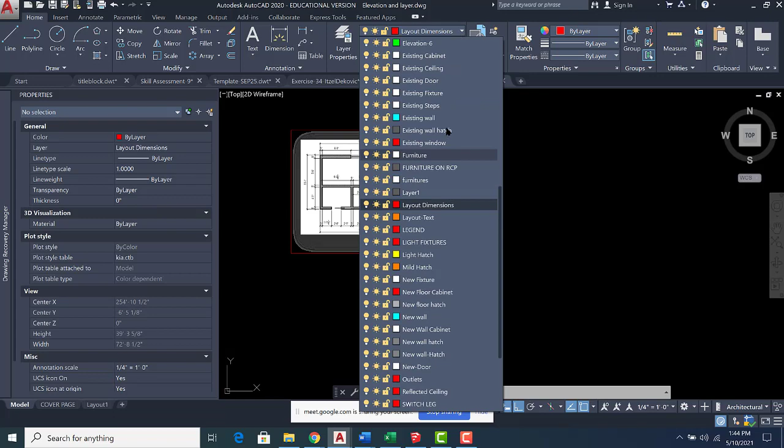So first of all, which layer is it? Existing wall. So I go grab the existing wall. Then I draw a line. Make sure your ortho is on, 17 feet 1 inch.

Then see, I have this line. Then I offset it 5 inch and 4 feet 1 inch, and again 5 feet. See, 5, 4 feet 1, 5.

So I start offset, 5. We stop the offset with spacebar, start it again, 4 feet 1, and I offset it again. Then stop the offset by a spacebar, start it again, 5 inch. See, so far I am here.

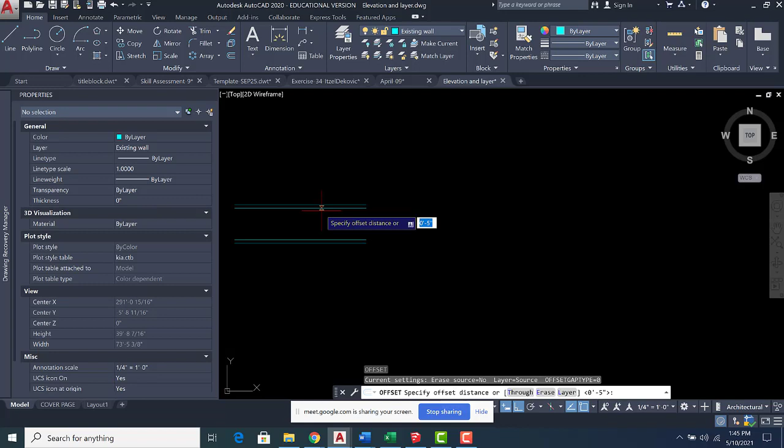Okay, then I have to offset it one more time, 5 feet 6, and then 8 inches. So offset 5 feet 6, accept, repeat again, 5 inch.

5 inch, it's a kind of strange. No, it's 8, yeah, exterior wall can't be 5. Yeah, this is 8, so I have to redo this part. Offset 8. So now I have the horizontal line.

I add one line from here to the end point. Then I go this way. So you know what, to make it less confusing, let's go with one side. Maybe I just go from this side. See, 5 feet, 5 inch, 6 feet, 5 feet.

So I offset 5 inch. Stop, start 6 feet. Stop, start 5 feet. So now I am here.

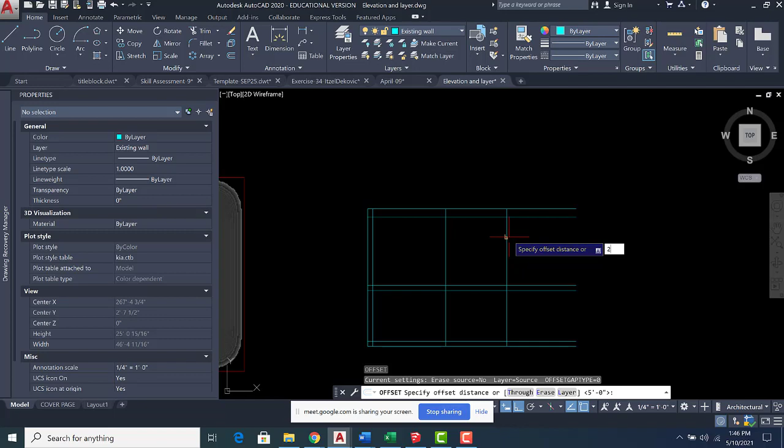Okay, then I need 1 foot 8 or 20 inch, offset 20. It gives me this side of the wall. Then I need 5 inch and 7 inch.

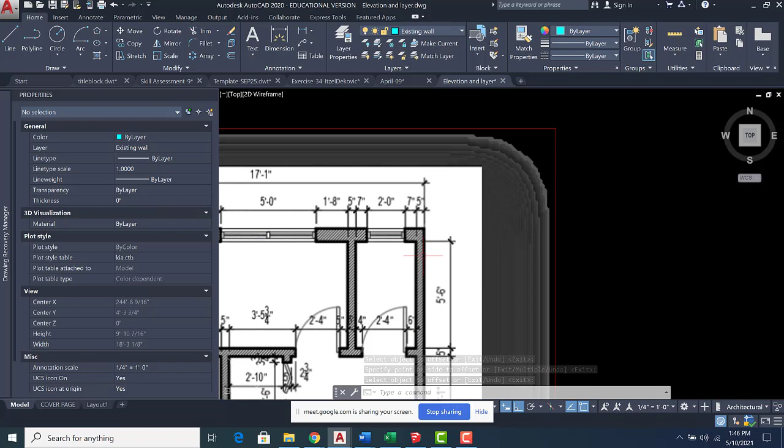So offset 5 inch, 7 inch, and then the last thing is this wall. No, actually I need 2 feet here. So I offset 24, this is the window opening. Then 7 inch, offset 7 inch. And offset 5 inch. See, I'm perfectly in the right place.

So now what I can do, I can go around and just first trim the extra line here. I use fillet, make sure the radius is 0. I want to do all 4 corners. I go with multiple, and see, here you go.

I just go around and get rid of those extra lines that I don't need. And see, for now I just work on this area, so don't go even there. Just focus on this part.

So the first one is the window opening, so I just use trim. I select this, and you know what, I select all of them as my cutting edge.

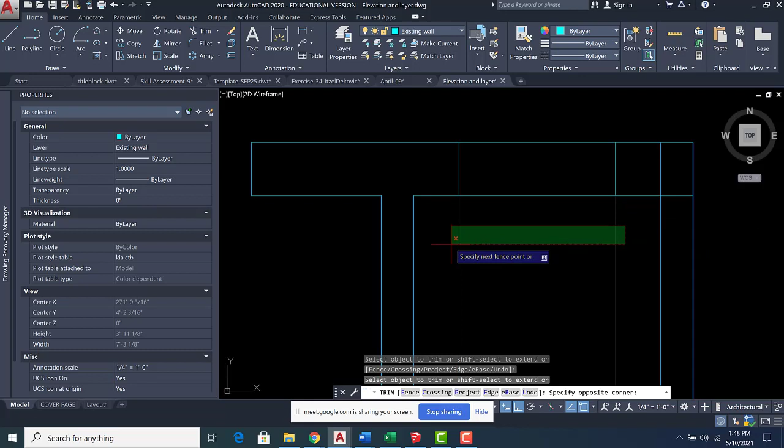See, this is my window opening, this is my wall, these two I don't need them. This is another wall, and then again this is my window opening. And here you go. So if you look here, see, I have my window opening, my wall, and my window opening there. So next, you can come here and you can just start maybe doing this part.

Okay, so to do this part, you can do it in many different ways. What I would do, you know what, I would... what should I do? Let me see.

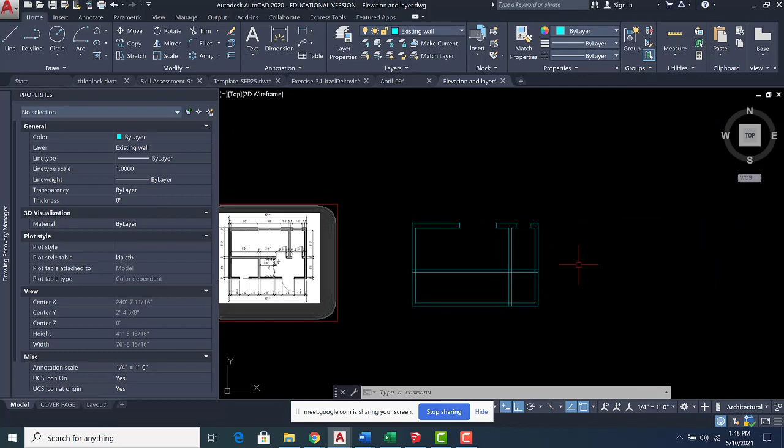You know what, I would just trim these pieces that I don't need. I don't need this part. I don't need this part. See, the wall, they all should be connected.

Okay, this one, I don't need it at the bottom. I just need it at the top. So I just delete those extra parts and this one. So now, if you look at it, it kind of makes sense. I have what I needed.

Now I want to add this door opening. You can offset this line, but it's much easier if I just add one line exactly the same thickness of the wall. Then for the first one, I can move it 6 inch. Then I can offset it 2 feet 4.

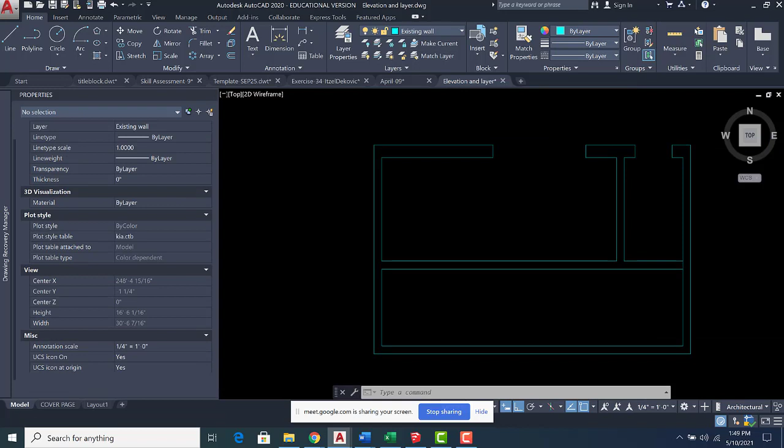So I move this one, M spacebar. I move it 6 inch. See, now I am here. Then I can offset it 2 feet 4. So offset 2 feet 4. See, now I have the outline for the opening.

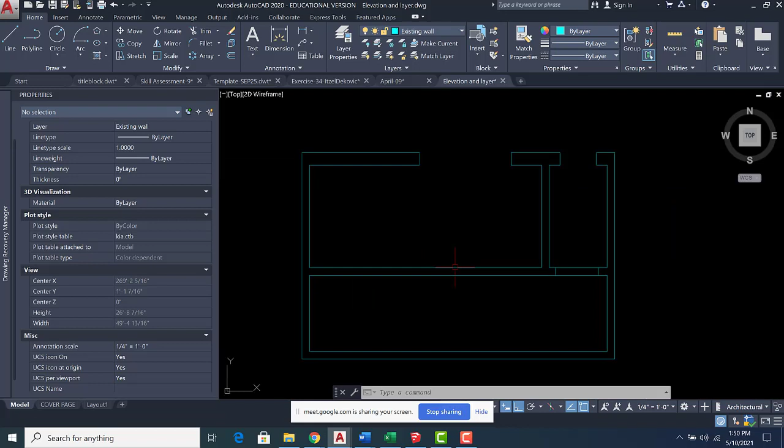The next one, I can do the same thing. See, this is 5 inch from here, then it's 2 feet 4. So I can do the same thing, I just draw another line here.

I can move it 5 inches. Then I offset. Because the last offset I did was 2 feet 4, if I just press spacebar, AutoCAD accepts the previous distance.

That's exactly what I needed. Then I can use trim, and I would trim this part. So now I have my openings.

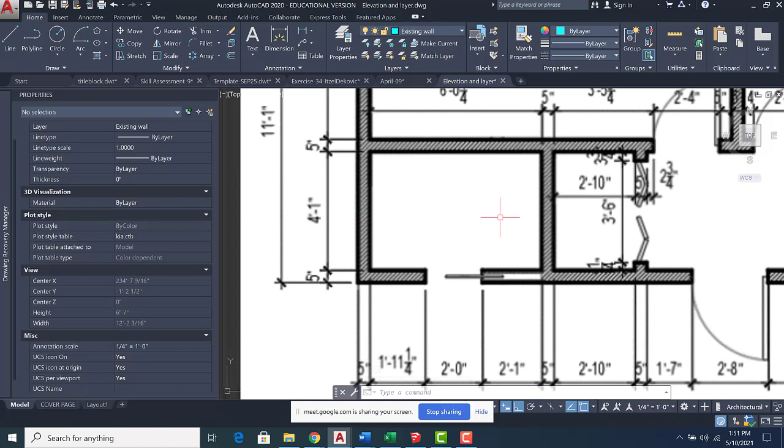Now wait a second, we are missing this part. So what about if I just draw a line? Okay, no, I don't need to draw the line. I just use this one and offset it. That's exactly what I need. I need exactly the same line.

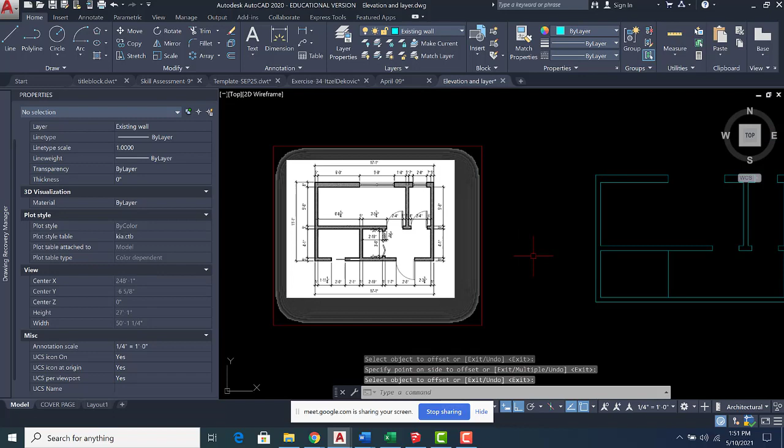4 feet and a quarter inch. So offset, sorry, 6 feet. Yeah, offset 6 feet, point 25. See, this is one side of the wall line. Accept, repeat the offset 5 inch, it would give me the thickness of the wall.

Then I have to do the closet. The closet inside is 2 feet 10, the thickness again is 5 inch. So I use offset 2 feet 10. See, this is the inside.

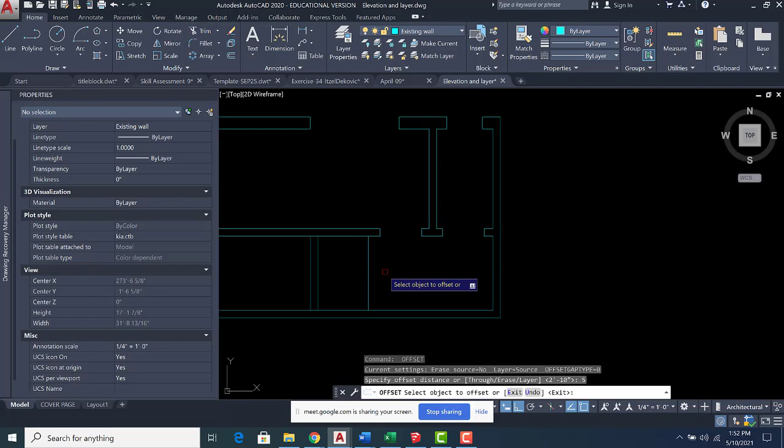I guess something is wrong here. If I'm not wrong... maybe no, 2 feet, okay, it's not a regular closet. 2 feet 10, then the thickness is 5. So I stop the offset, repeat the offset, 5. Yeah, it's fine, so now I am here.

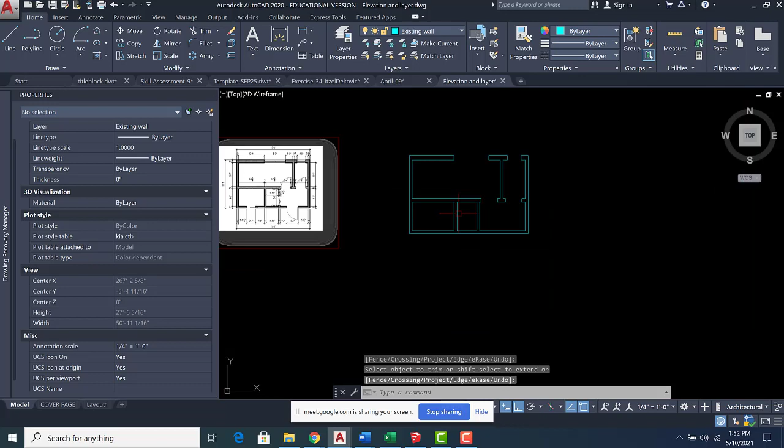And I can just start trim. I have to make all of these walls connected. Here you go, I use trim and trim all of them. I'm missing this opening, see, from one side.

I guess both sides is 3 3/4. See here, it's hard to read, but I'm pretty sure this was 3 3/4 and 3 3/4. If you want, make a note. Let's see if it works.

So again, what I would do is just draw a line here, offset 3.75, this is the opening. Then I need 3 feet 6.

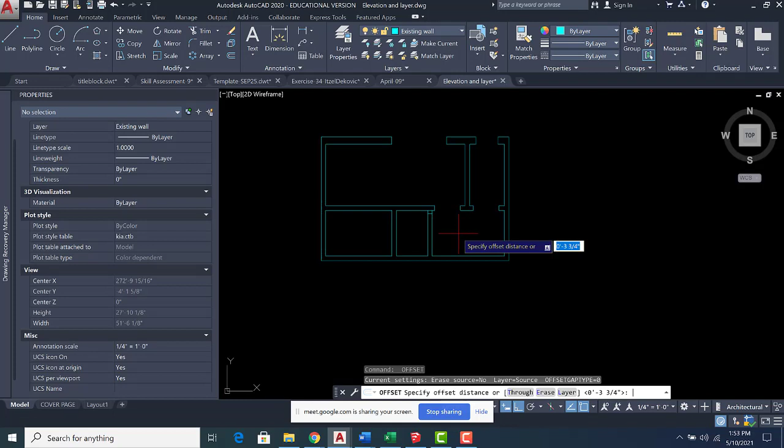Stop the offset, I press spacebar to start again. 3 feet 6, or you can just type 42 inch. And let's see if I measure this one, 3 1/4 and... yeah, see, one side is 3 1/4, the other side is 3 3/4.

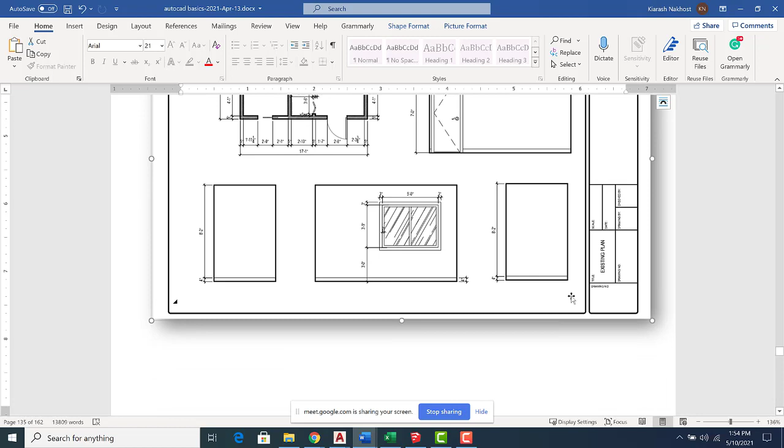So here it's hard to read. This is 3 1/4, the other side is 3 3/4. So make a note because it's hard to read this one. So then I use trim. If you want to fix this, if you look at your handout on page 135, you have this plan. So make a note here.

Okay, so one side, wait a second if it's readable. One side is 3 1/4, the other side is 3 3/4. So next, I erase this line and I trim this thing. So now I have the opening for my closet.

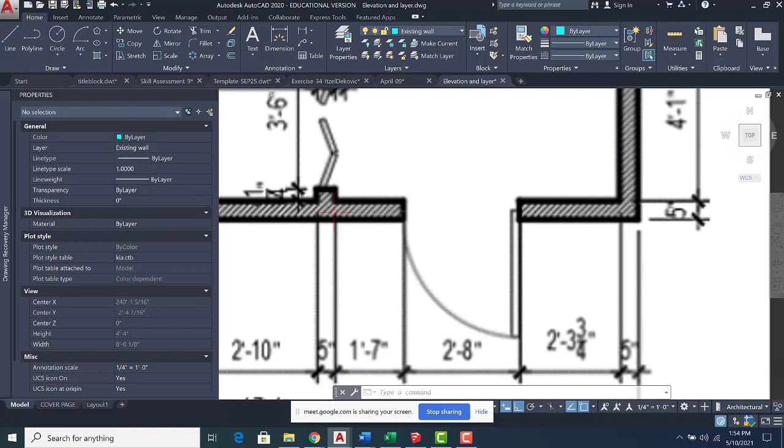The only missing part is the door here. And I know that from the closet, if I go 1'7", I have the start of it, and then 2'8". So I just draw a line here and I move it 19 inches or 1'7", offset it.

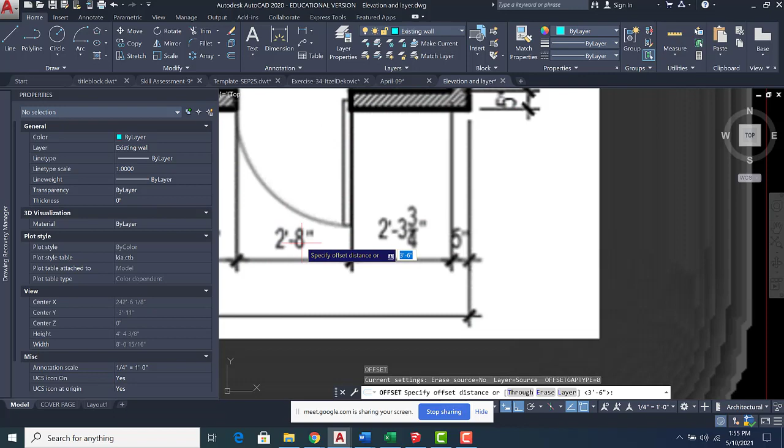2'8". 2'8". Here you go, so then I use trim and I delete this part.

Now I have, no, something is missing. Yeah, this door is missing too. See, from this side is 2'1".

If you don't want to add those lines, you can just offset this line. You can use offset 2'1", offset 2'1". Again, you can do it in many different ways. And then just draw a line from here to here and then erase this one.

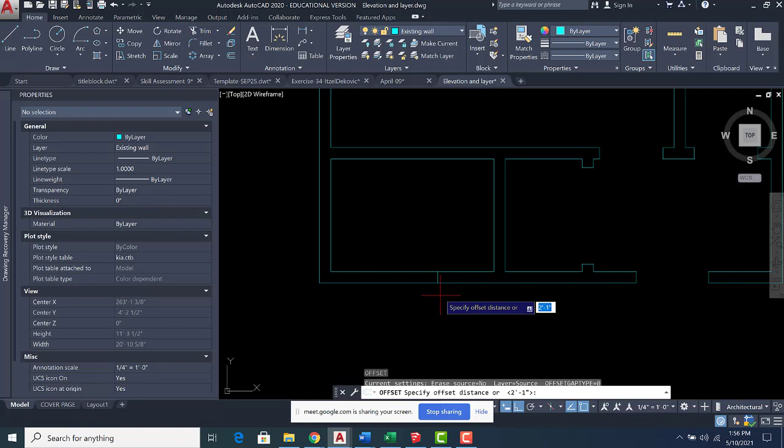Then the door opening is 2 feet. So offset 24, 24 is 2 feet. Then use trim, and here you go. So now I have all the openings.

I have to just add the doors and windows. I don't know if you have done any doors that are 2'8" and made a block, then you don't really need to do the door. I don't know if I have any door.

By the way, just very quick, how do you recall the block? You just type I, enter, then the insert dialog would open, and you have a few options. Current drawing means any block that you have in this drawing, you see it here. Recent is the recent block that you used, and then other drawing, any block that you have in another drawing, it will be here.

Actually, not, they are not all of them. I guess we can go and find them. No, I don't know, it should be more than this. Again, this is something new, we didn't have this before.

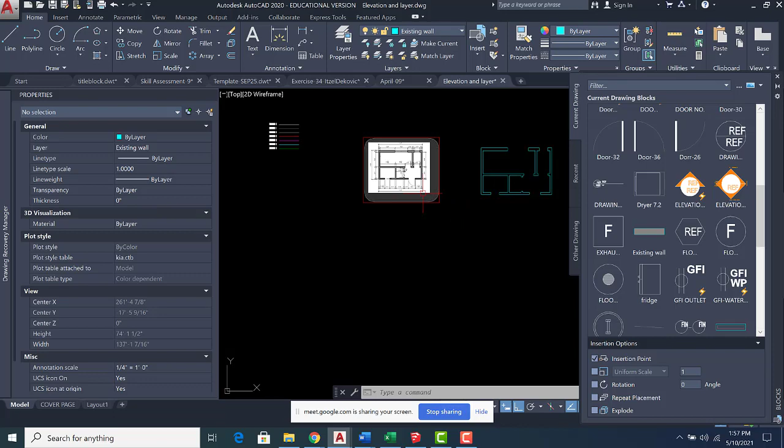2'8" is 32. Here, probably this would do it. So I just select it and I place it here.

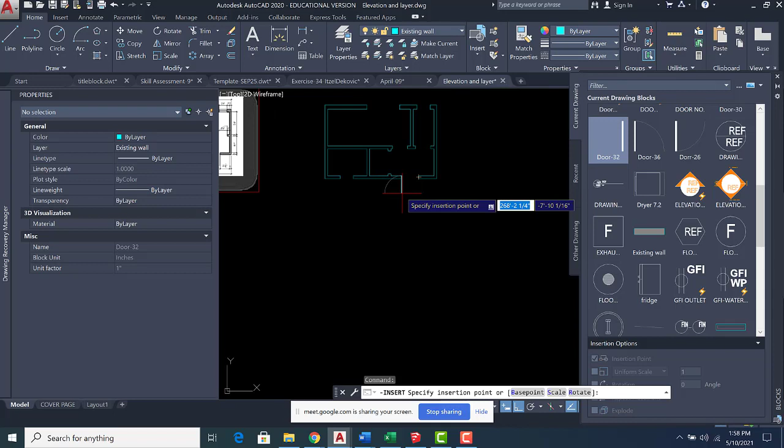Okay, but I want it to go to the other direction. So before I do that, let me see if I change the... no, insert rotation, I need to mirror it. So here it doesn't give me the option of mirroring. So I just insert it, then I mirror it myself.

See here, I just place it here, then I just type MI, select it. This is my center of mirror. I don't want to keep the other one, so I just say yes to remove that one.

The next one is 2 feet. I don't know if I have a 2 foot door. You know what, let's make it. Oh no, this one is the sliding door, the pocket door. I have to make that one.

Let's see, 2 feet 4 is 28 inch. Even if I have it, I would make it. I don't know, I think we don't have it. So how can I make a door?

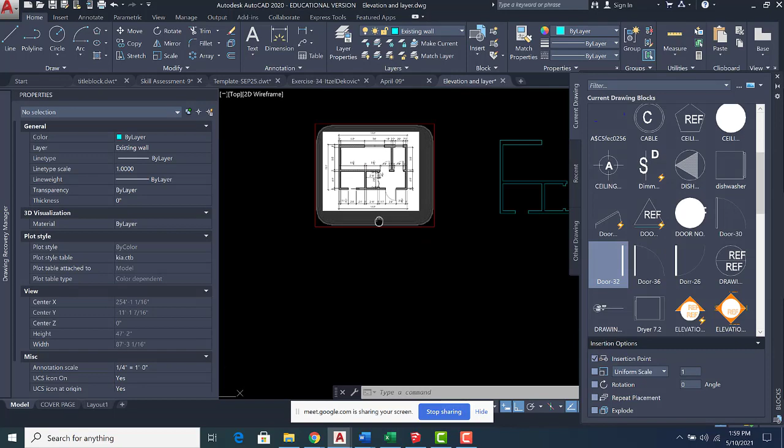First of all, if you want to make a block, use layer 0. Okay, layer 0. Then I draw a line, midpoint to midpoint. Then I offset it 1.5. I'm gonna go that way. Then I use either rectangle or boundary.

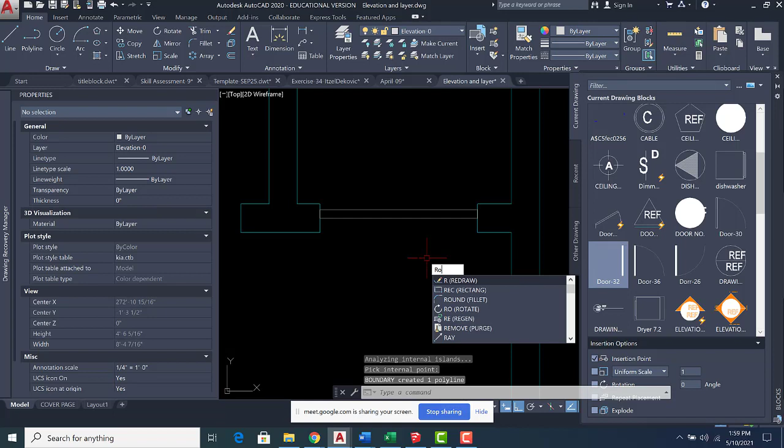If you are going with boundary, you have to click inside. If you go rectangle, it's obvious what to do. Rotate, grab this one. The door is going inside, so the hinge should be there. Then I erase these two.

The next thing that I would do, I would add an arc. Which one? Maybe start, center, end. See, this side is positive, so my start would be here. Center is the hinge, and this is perpendicular.

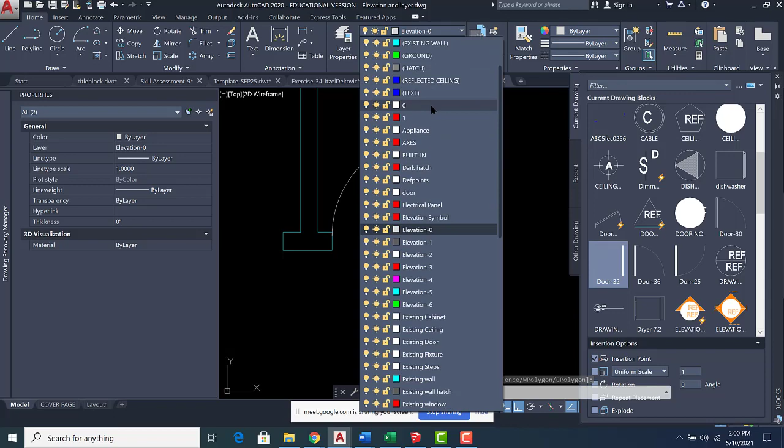Here you go. Then I prefer to make this one in a different color. It says elevation. Oh, I go with elevation 0. No, this should be layer 0. My bad. Where is my... see, you want to put it in layer 0.

Okay, and then I want to change the color of this one. Select it first, then go here, change it to 252 I guess. And then if you want to make a block, type B, enter.

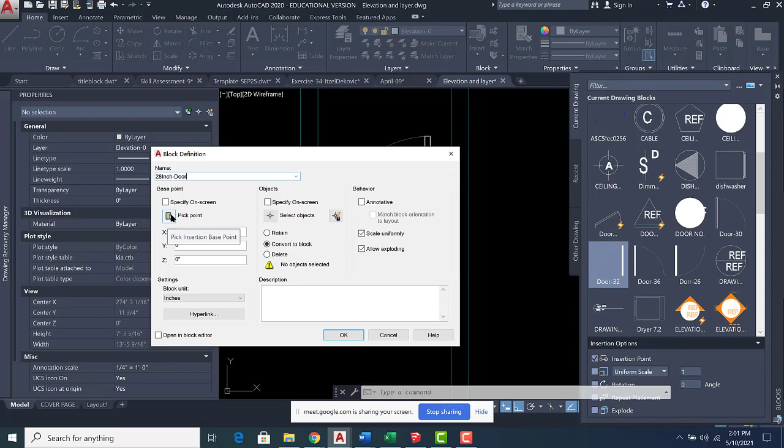This is 28 inch dash door. To make it a block is... B, block B, enter, okay. Pick point is here, the hinge. Select object is this one, press spacebar and OK.

So now that I made one of them, the other one is the same. So I just copy this one, copy, select it. My base point could be here to here. It would be exactly the same distance. So now I have these two doors.

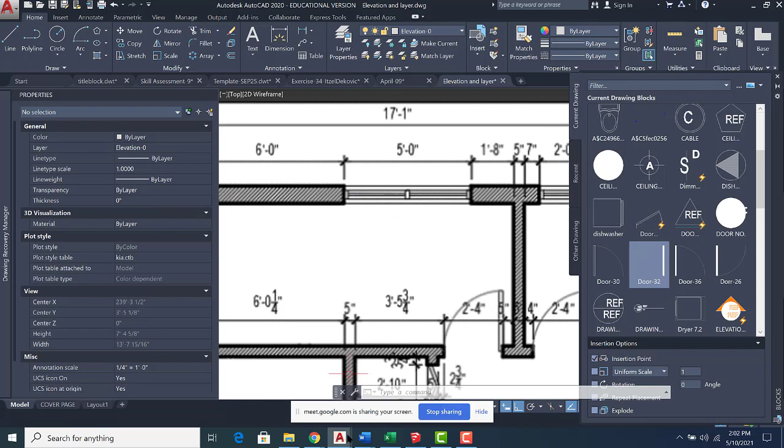Let's do the window. So this window, okay, I didn't give you any information. So wait a second, what do we have here? Okay, see that in elevation, I'm telling you guys the thickness is 2 inch, but I didn't give you this distance, so just write it in your handout. Maybe we go with 4 inch. Okay, this frame, are you guys writing, is 2 by 4.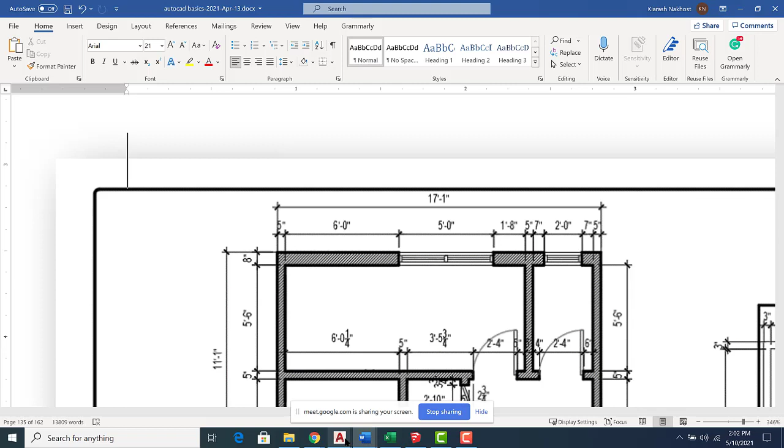See, we have 3 frame, 2 by 4. So I go back to my AutoCAD. So I change my layer to existing. Oh, I forgot something, these two doors, I'm done with them.

They are in layer 0. I want them to be in existing door. So I'll just change them to existing door. After I insert them, after I make the block, I change it. See, when I select, it says existing door.

So our window, I go to existing window. Do I have an existing window here? Here, existing window. Then I just type rectangle 2,4. Then I move it.

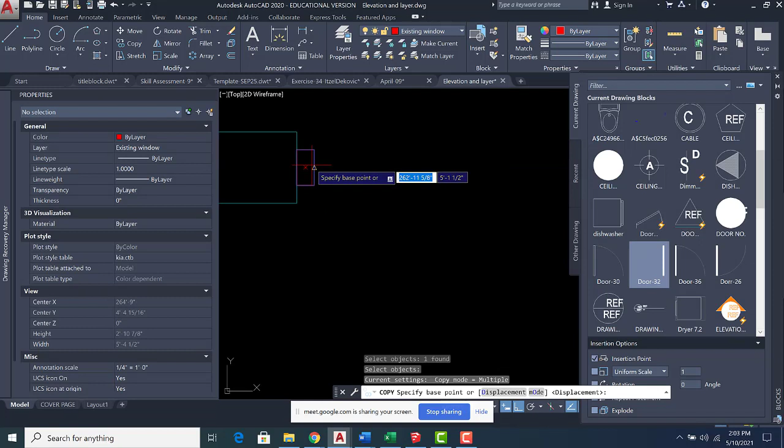See, midpoint. In this case, I want to place it at midpoint. Then copy this one from, doesn't matter where, as long as you go perpendicular to the other side. So I have these two. Then I just draw a line from endpoint to endpoint.

Endpoint to endpoint. Now I need another one, another mullion in the middle of these two lines. So I copy, see, midpoint of the frame should go to the midpoint of the line. Just make sure that your line both started from the same point, see, from the end of this frame to the end of this frame.

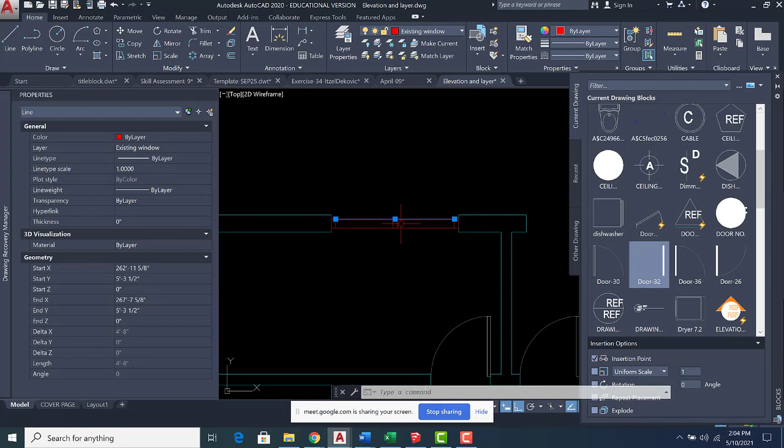If by mistake you continue this one to the end, you end up somewhere else. It won't be in the middle of this opening. So see here, from inside the frame to inside the frame here.

As I mentioned, I like to have this one in a different color, so I keep it in the existing window. I just put it maybe in layer white, color white. When you select it from property, you change the color. Then I have to add the glass.

So I would go middle to middle, then I offset it 0.5 on both sides, here and here. I don't need this one. I have a glass that is 1 inch thin. It's not realistic that glass is really this thin, but this is just a symbol.

So then I match this one with this one. I can do the same thing here, or I just mirror it. I don't waste my time, I just mirror this one to there. And because it's exactly in the middle, that's perfect.

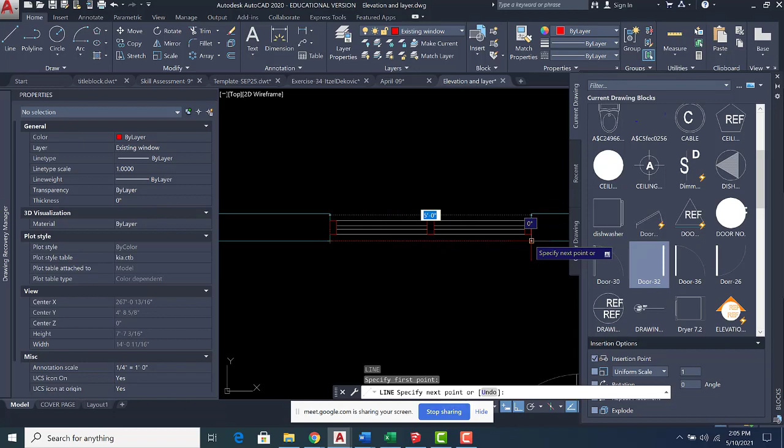Then I just add a line. See, there is a line here. You have to draw a line like that. Let me see if I can show you guys here. See here?

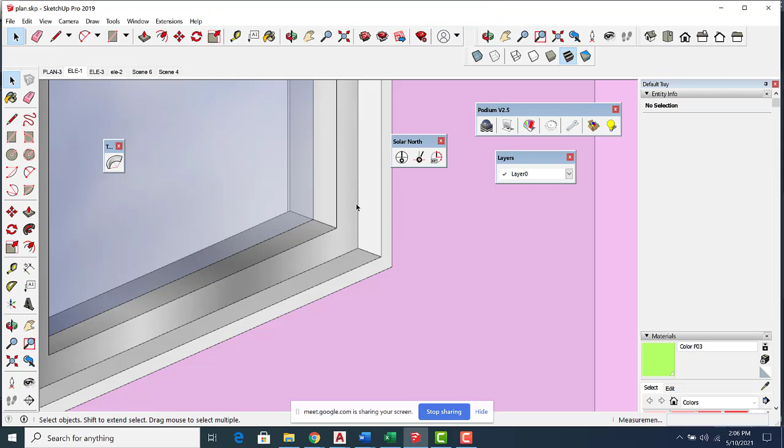See, this line is the line that you see from the plan. This line is the inside one. So you see the thickness of this one. Let me go to the plan.

See, when you look at that one, you have a thickness of the frame. You have a glass. This one is this frame. Then you see the same thing on the other side. And this one is the one that I'm drawing. See, you have a line from here to here and here to there.

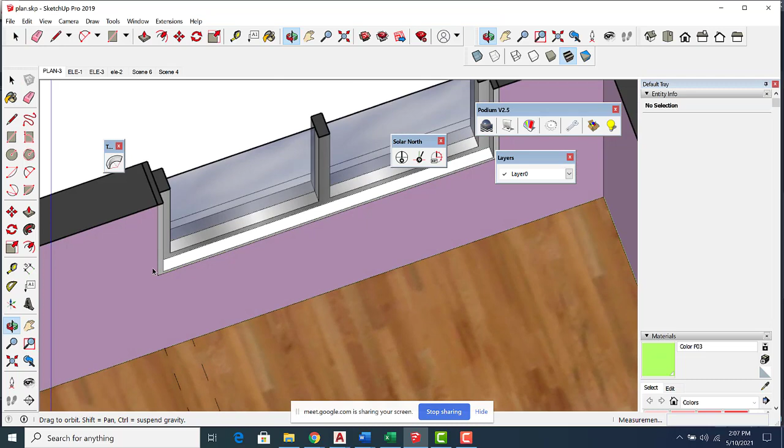Again, if you look here, the reason I'm playing with the thickness is because this is further from this one. This is elevation, it's far from me. So I put that in, and I can match it with this one.

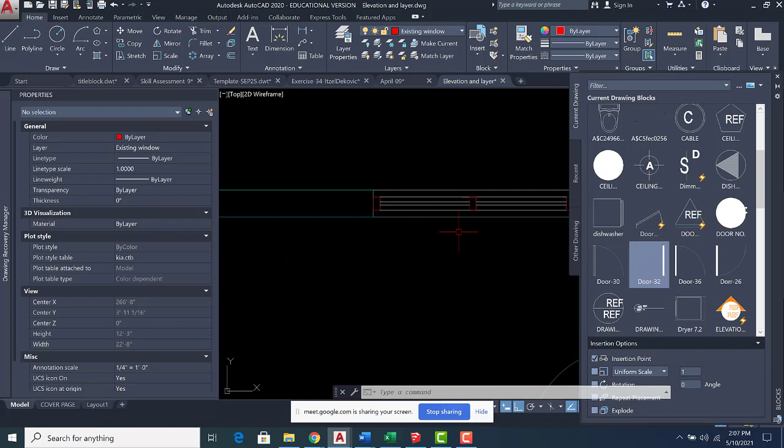So then the next one is kind of the same frame, just we need less than what we have here. You can do the same thing, draw a rectangle, place it there, but what I would do is just copy this one, maybe copy all of them, and place this one here.

Then I just copy this frame from here to here. Then I use trim, and I just trim these extra lines. So again, if you want to do everything from scratch, you can draw a rectangle, place it here, place it there, draw all the lines, but this is a shortcut. I have it there, bring it here, and I just fix it.

And then I'm adding just these 2 lines. The reason I didn't copy this part, you can do it, but trimming it would sometimes be a little tricky, because we have 2 lines on top of each other. Sometimes when we try... oh actually no, it's easy.

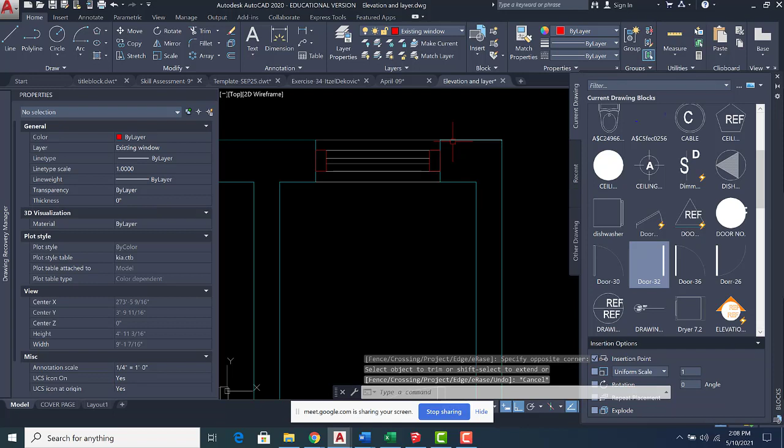Here you go, I have it here. If this was continuous, sometimes it was hard to grab the right line to cut, but it was easy. We can copy all of them and then trim them.

So then the closet is missing. I just draw a line, midpoint to midpoint. How many doors is it? This is exactly the same plan. See, I need 4 panels.

So I would go back. I type div, divide this one into 4. If I don't see it, I have to change the p type.

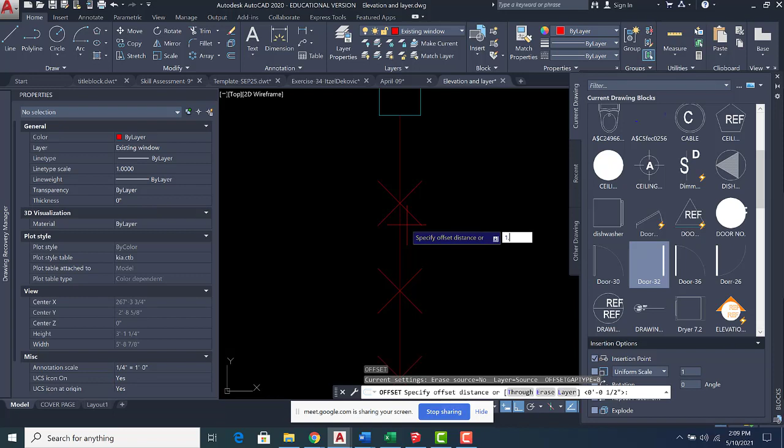Then here you go, I just offset 1.5. I go outside, I use rectangle from here to there. Then I erase everything that I don't need. So this should be in which layer? Door. So I just match this one with this one.

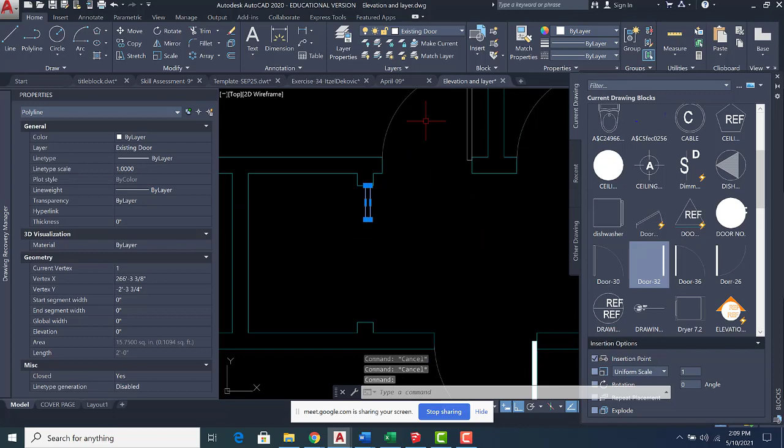Just to double check, when I click here, it says existing door. So rotate this, my hinge is here, and I turn off my ortho. I would go something like that.

See again, to refresh your memory, there is a hinge there. It's opening here, there is a hinge there.

Now I just mirror from here, make sure your ortho is on. See, exactly the same thing. See where I'm mirroring from here. Then I need another one exactly on this side. So when I have one, these panels, I just copy them.

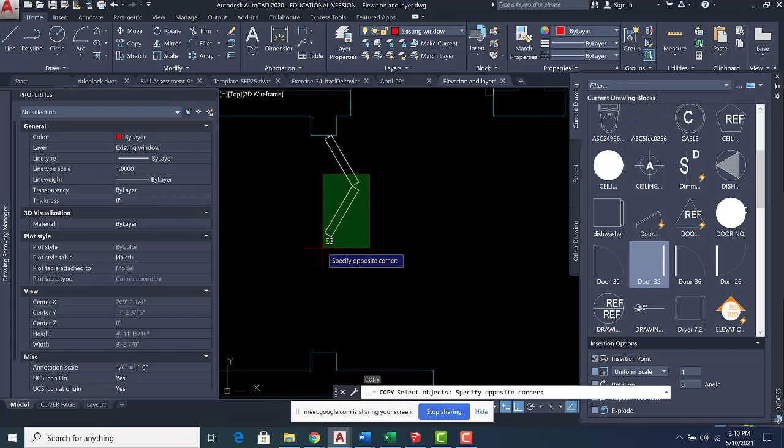Again, the tricky part is you have to select the end of it and make sure it's perpendicular to that one. We don't end up here or here. Ortho on, perpendicular, and these two align. So far we just review everything that we should know by now.

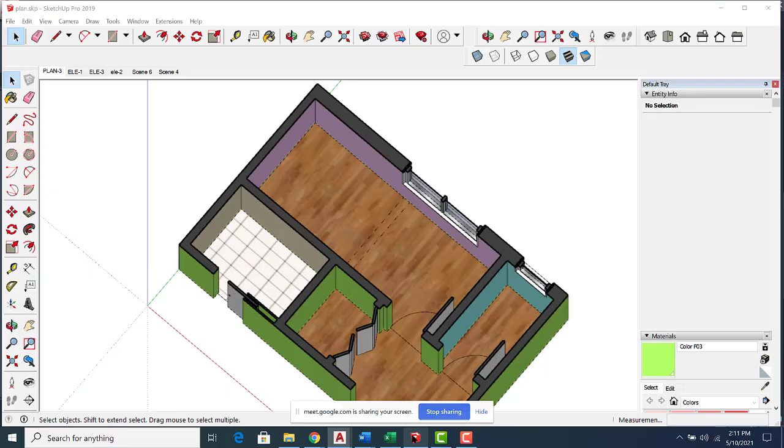The only thing that is new in this exercise is this door. So this door is a sliding door. We call it a pocket door. The pocket door goes inside when it's open, and outside when it's closed. And again, it should cover the whole opening. So the easiest way to show something like that in AutoCAD, I draw a line.

It should be exactly in the middle, so I just draw a line midpoint to midpoint. Here I cannot offset it on one side, because if I do, the door won't end up exactly in the middle. So what I have to do is use offset.

The door thickness is 1.5, so I have to offset half of that. So offset 0.75, and I offset it on both sides, one up, one down. Then I erase that line, I don't need it.

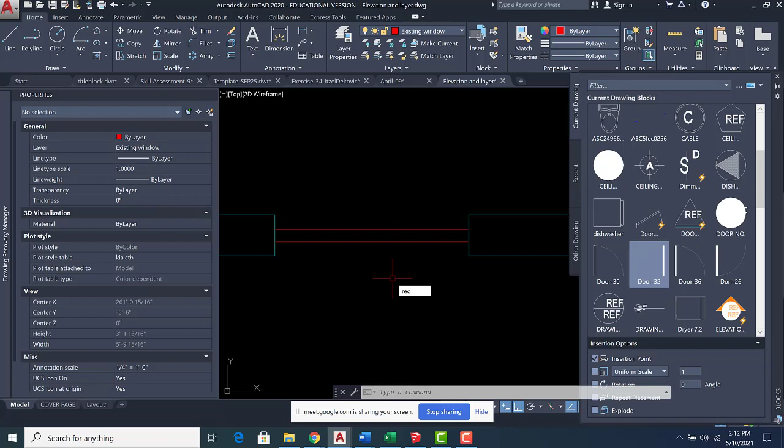Now I need a rectangle as a door. Again, you can just type BO, or I just type rectangle. The whole reason I explained boundary before was because I wanted you guys to learn it. Now hopefully you know it, so rectangle is easier. So I just draw the rectangle, and remember, when I open this door, it goes all the way in. So I place the door like that.

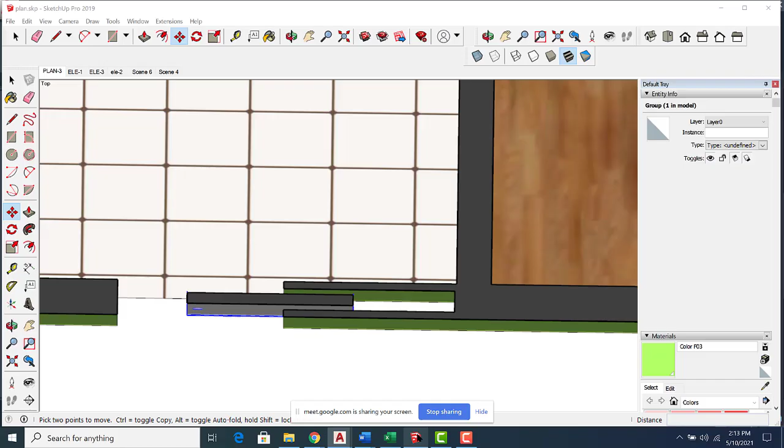I erase these two guidelines, I don't need them. Then, see, I need a gap, otherwise the door cannot move. See, we have a gap. So for that gap, I would go with 0.75 again. So I just offset it, and here you go - I offset that line, rectangle, one more time.

Then I use trim. So what I don't need here is this line first, because I need an opening here. Then I don't need everything after this one. See, now I have my door and the gap between.

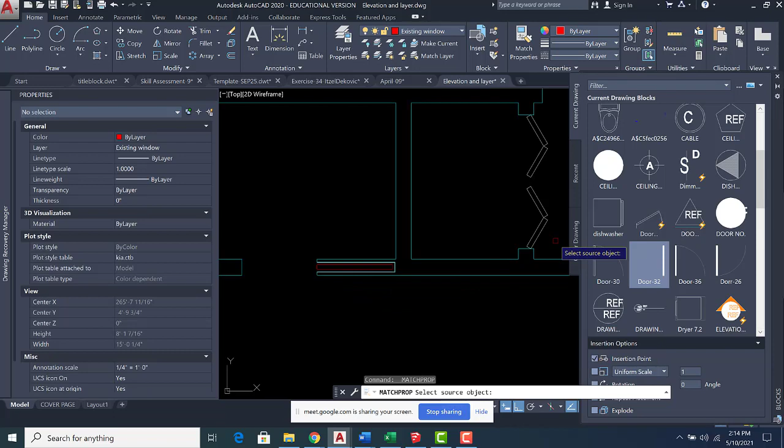The tricky part is that this line is part of my wall, okay, and this one is my door. So I match this one with my wall, and I match my door with this one.

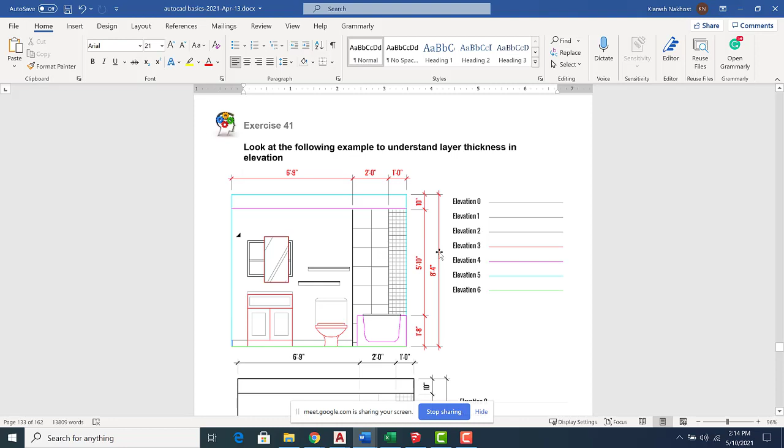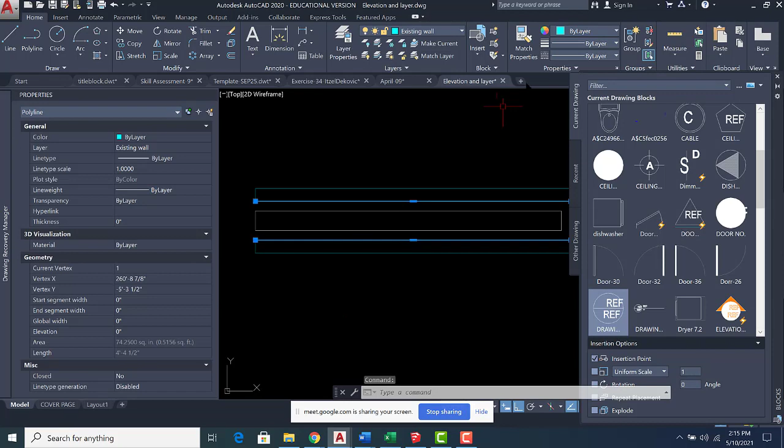Because cyan is one of my thickest lines - if you look at the handout, cyan is the thickest after green, a little bit thinner than that one. So when you have two cyan lines side by side, that close, what happens? When you print it, you end up with just one thick line. So we have no choice but to change the color of it. How can I do that? You just select it and change it, maybe to white.

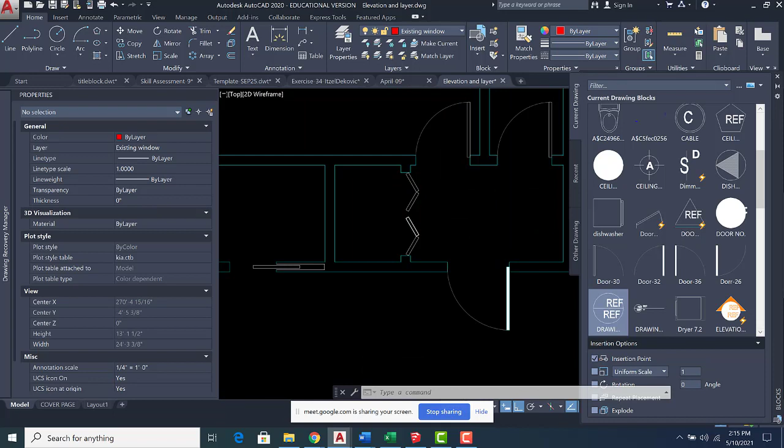And then we move the door. This is the way that we show a pocket door - we show it half open. In plan, we show it half open; in elevation, we show it closed. These doors we show half open, elevation closed. The hinge door we show completely open, unless we don't have enough room.

So for example, if I want to print this one and don't have enough room, sometimes we show it half open, sometimes like that - but then you have to explode the block. I don't want you guys to do it, I just want to explain some stuff about how we present. Sometimes we can show the hinge door like that too, but just when we don't have enough room - if I want to add a note at the end of the drawing, I show it that way. But other than that, we always show it open. So: hinge door completely open, pocket door half open, closet door half open.

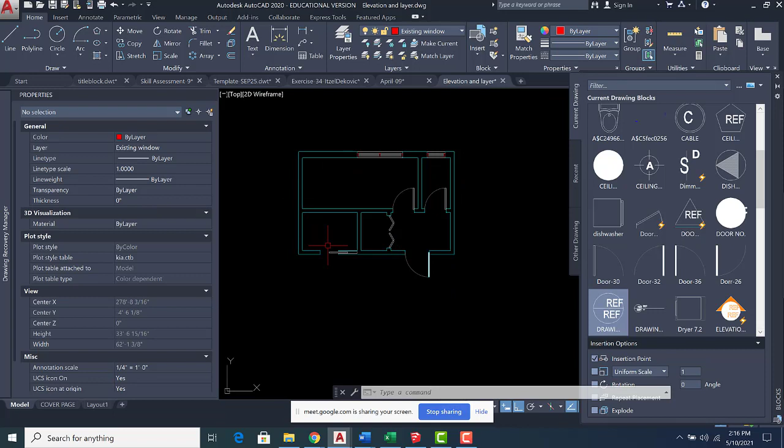So now I have the whole plan, everything. What is missing is the wall hatch. I didn't ask you guys to hatch the floor, I guess, so we just hatch the wall, but it's a good exercise if you want to hatch the floor too - it's just a simple thing to do. If I want to hatch the wall, type H, enter. Again, I asked you guys to use solid, hatch solid inside the wall for now.

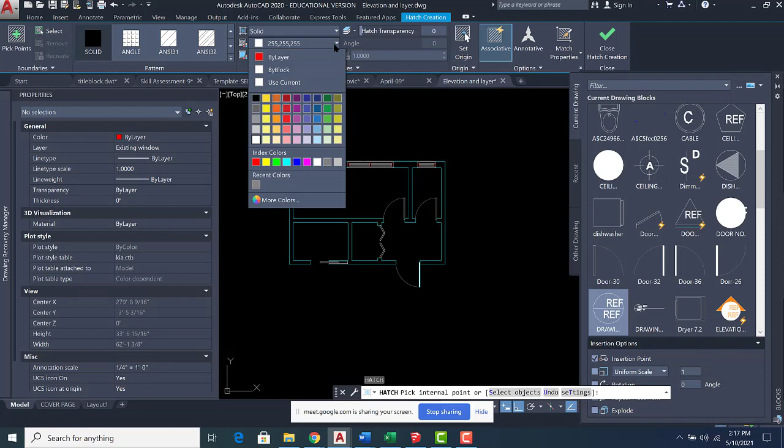When we go and find our printer, we try it. Maybe we can just go with the other hatch, but for now we just put solid. See, something is wrong here. When I go to hatch this one, it shouldn't be this, 255, AutoCAD will not print it. Always this should be by layer. Okay, the same thing here. Always make sure they are all by layers. If they are not by layers, then anything you draw would be in different color, different line type, different thickness. Okay, so I repeat the hatch.

Oh, I'm in the hatch. You know what, let's fix the layer first. I want to put this one inside the existing wall hatch layer. Here, existing wall hatch, this is the correct layer. Then I just type H, enter. Then I go with solid. I click inside this one, I click inside this one, and I click inside this one. Press escape. So I hatch them.

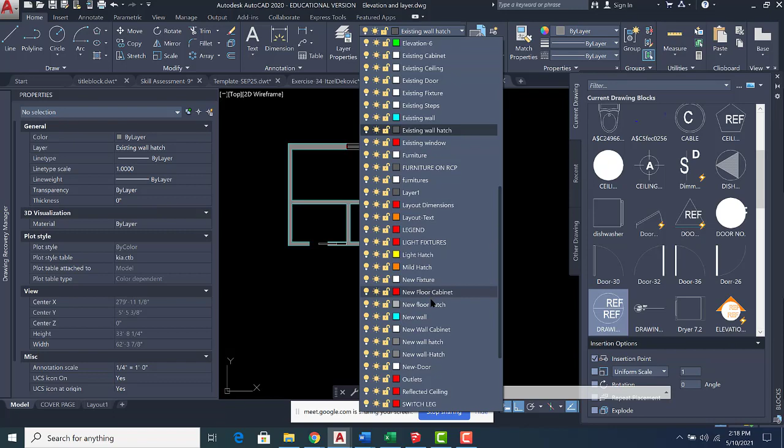If you want to hatch the floor, go select the new floor hatch or existing floor hatch, doesn't matter, this is not a real project. Do I have existing floor hatch? No. So I would go with new floor hatch. Imagine that we are renovating the room and we want to change the floor finish. So when I am in new floor hatch, if they all have the same finish, go ahead and hatch them.

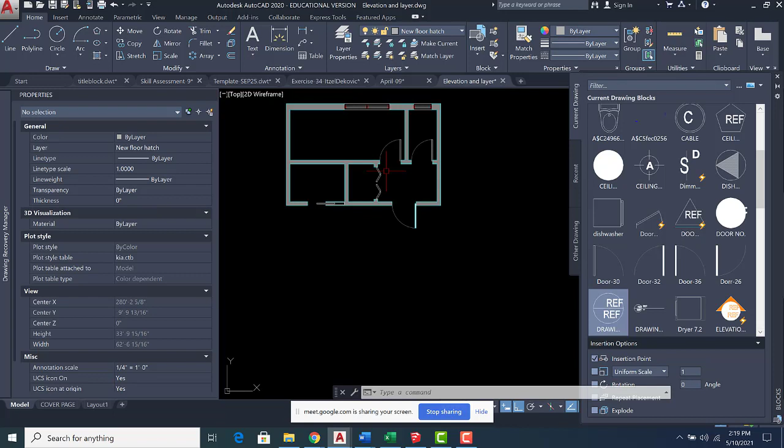Just keep in mind, AutoCAD cannot hatch an open area like that. And we don't want to hatch this part, you just want to hatch inside this room. So while I'm in new floor hatch, I just draw a line from here to here. Maybe here or here, doesn't matter, I'll go maybe here. No, usually it goes in the middle. It's a tough call, I will go maybe here for now.

Okay, so see, I close the area, then I go hatch, and let's see what we want to do. I want to put, there is a floor hatch that people use for wood flooring. It's not really wood flooring, but it's the closest thing we have. Where is it? It's this one, DOLMIT. So I select that one.

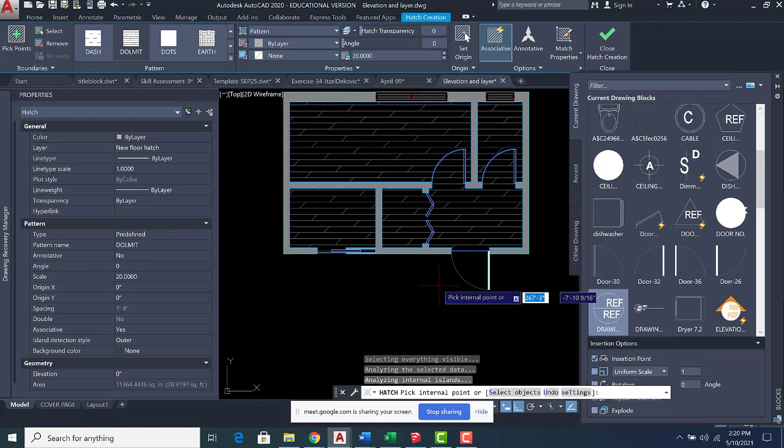See, it's too tight, the scale is not good, so maybe I change it to 20, and now it's too big. Doesn't matter, I would put it now, then go and modify it. See here, I hatch all the floors. If I'm not happy, I just click on it, and from here I change it maybe to 15. Okay, that's better. So now I hatch the floor.

I guess that's enough for today. I don't think you can do more than this today. But if you have time, if you finish, then...

See, you can do the elevations. Because I want you guys to do 4 elevations inside this room. See this room, forget about the rest of the building, just these 4 walls. So how can you do that?

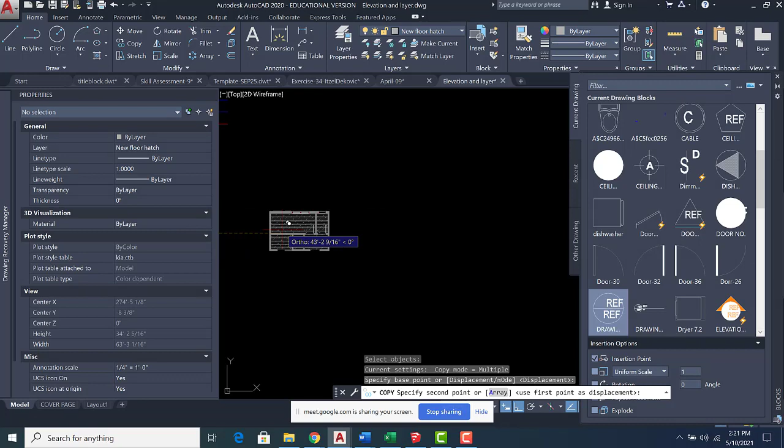Again, copy. See, I copied this part. I bring it out. I erase anything that I don't want. I don't need the floor hatch. I don't need the wall hatch. Okay, and even I don't need this part, I don't need this part. And I would delete this area. I keep the rest of them because then it would be confusing. If I delete more than this, it would be confusing.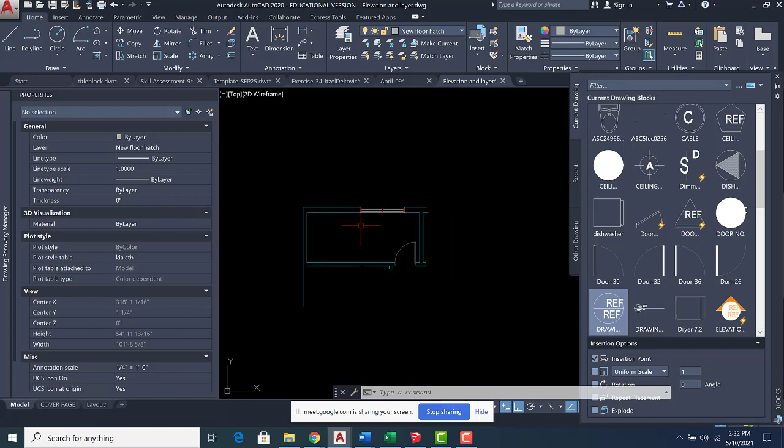So then remember, depending where you're standing, you draw a line. Then we trim everything after that, we use erase, we erase it. So the first thing we need to know is where our floor is. So I draw a line, I select it, and I put it in the right layer.

Elevation 6, what's the height of the room? You can see it here. 8 foot. Okay, don't let this information confuse you guys. The height of the room is not 8 foot 2. 8 foot 2 is after the baseboard. Actually, this is really bad dimensioning. I always tell my students, put the baseboard, put the height, then do one overall. So I did a bad job here, or maybe I chose the wrong drawing, but anyway, the height of the room again is 8 foot 6.

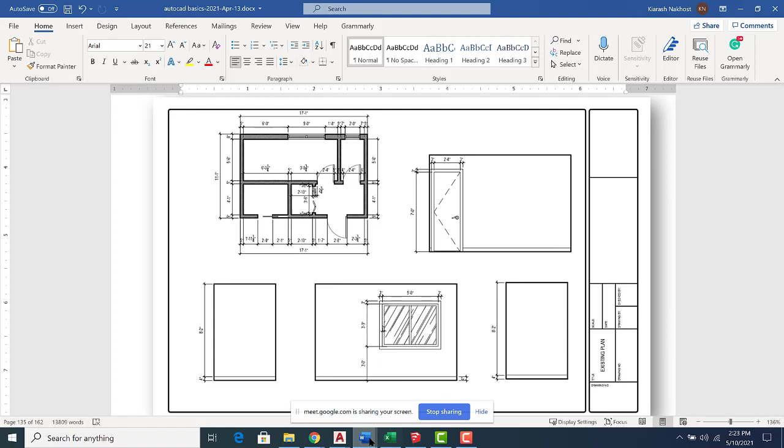4 inch plus that, it's 8 foot 6. So if you want to fix it, make sure you put a note, the height of the room is 8'6". Then, here you go, I just use offset, 8'6", and here you go.

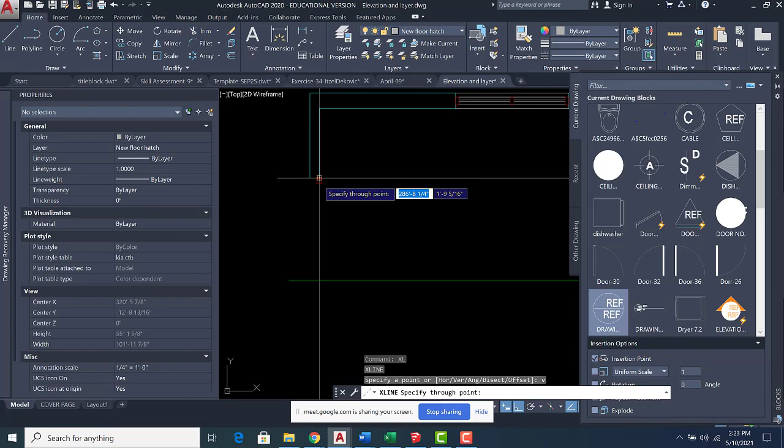This is my ceiling. I prefer to bring it a little bit lower. Remember, I use XL, vertical. I go with interior wall. I show the opening, the window frame, opening, and again, the interior wall.

So to make it easier when we are using the trim, I would go here and change my wall to cyan, elevation 5. Then for the window opening and the frame, maybe I select all of them and I put them in elevation 3 maybe, so I know those are window, this is wall.

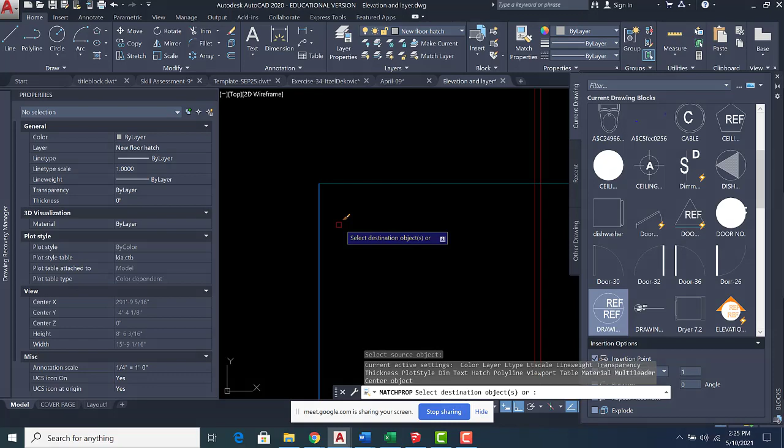So from here, I can use fillet, multiple, and I just get rid of those extra pieces. This one, it's in the wrong layer, MA, and fix it.

So now I have the window opening and the frame. What is missing is the height of the window from the floor. So we can get that information from here. See, 3 feet from the floor, 3 feet 9, and the frame around it is 3 inch. So 3 feet, 3 feet 9.

So I go back here, I use offset, 3 feet is the bottom of the window, repeat it, 3 feet 9, this is the top of the window. Then I use rectangle, see, from outside to outside. This gives me the window opening.

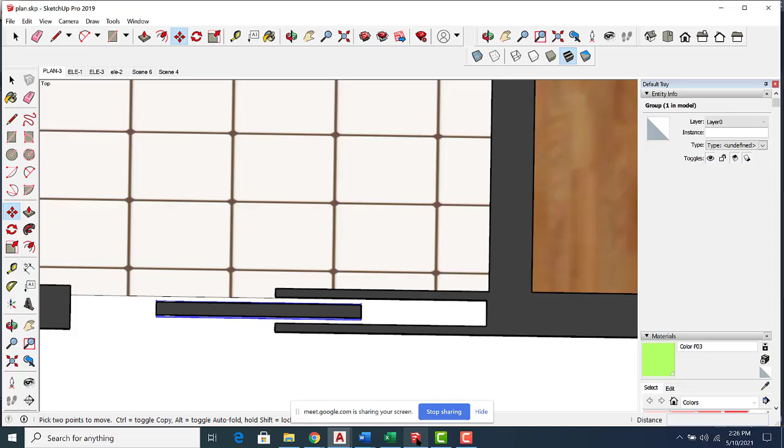Then, see, I need to add this frame. See, this is exactly the same plan actually. See here, I have these two lines. I need this one.

See, if I offset this line, this rectangle, if I offset it, it would give me this one too. So here you go, I use offset. So this is 2 inch, but again, I would measure it here. And see, this is my rectangle.

I offset it inside. So what I need here, I need this frame too. Okay? See, either look at the elevation or look at this one. See, here it's one piece.

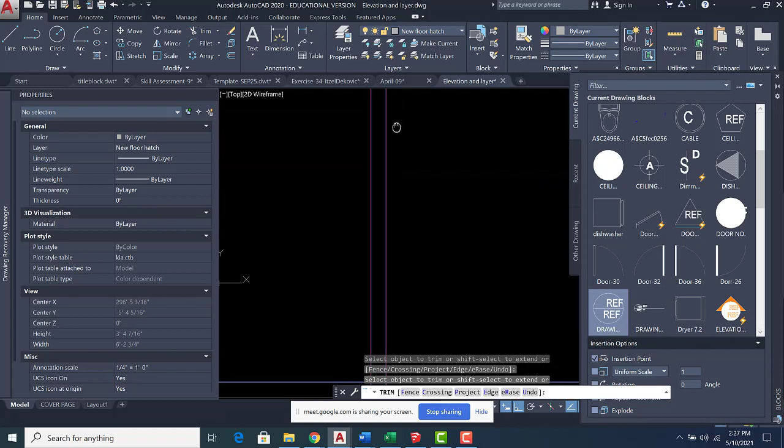So what I would do, I use trim, select this one, and select that one. So I don't need to see this part, I don't need to see this part. I trim those extra pieces. Then I would erase all of my guidelines.

And then I just match. See, this is a right layer. So I match this completely with this one. Now I want to add the molding around it.

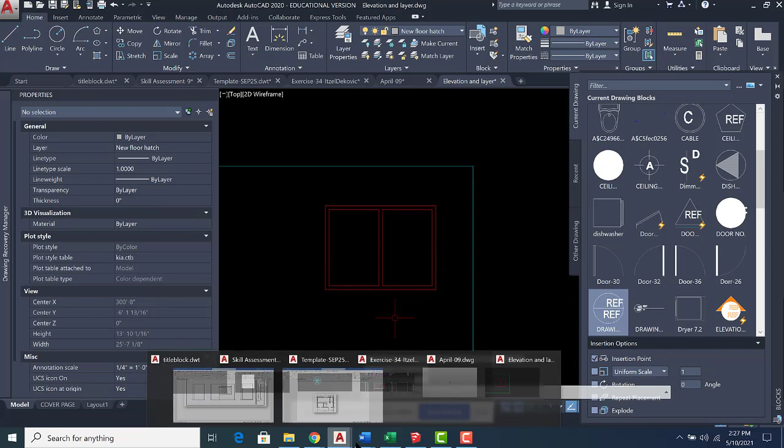Here, see, it's 3 inch molding. So what I would do, I offset 3 inch, and I'll put this one in a different color to make it nicer. Maybe elevation 2. So this is a window.

I need a hatch for the window. H, spacebar. So which was the hatch? It was, I don't know, RR something. AR-RROOF. Yeah, here, AR-RROOF, I select it.

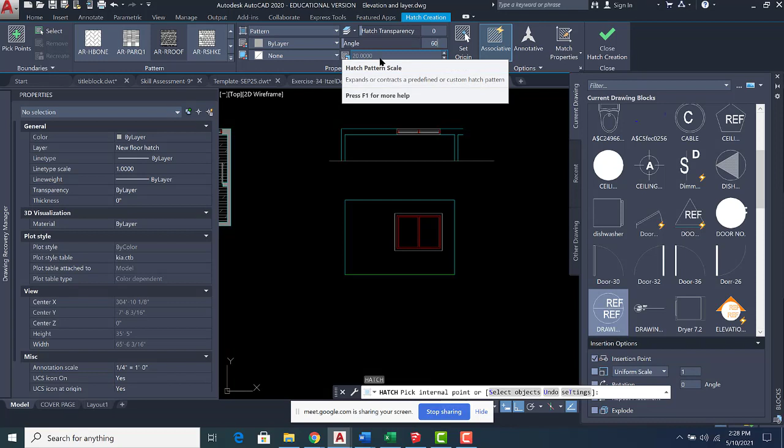Then I change the angle to 60. And see, the scale is 20. It's too much for this one. But I would, see, let me see. Oops. Come on. Not that bad. You know what? It's fine. I would just keep it.

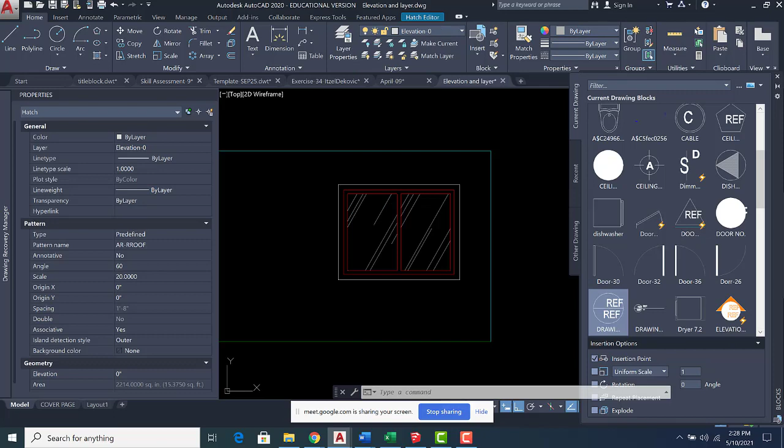The only thing is probably in the wrong layer. So I select them. See, it's a new floor hatch. So I just put it in elevation 0. It's a symbol. It could be the thinnest one.

So, the only thing missing is the baseboard. The baseboard, it's 4 inch from the floor again. So I go back here. I offset 4 inch. And again, I don't want it to be that thick. I would select it and I put it in elevation maybe 2.

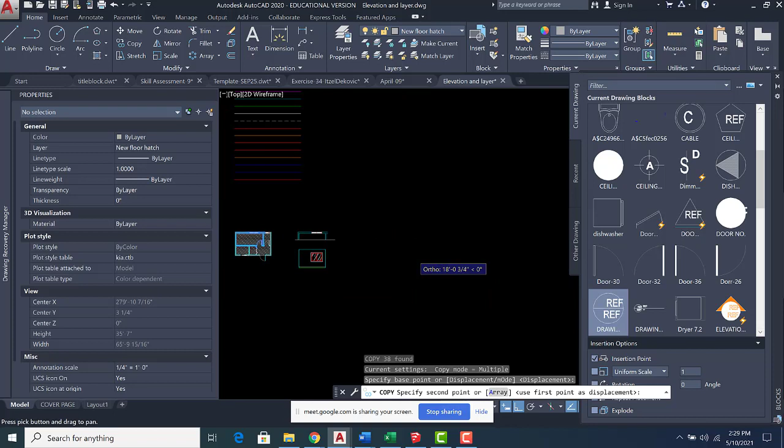And here you go. So I did one elevation, but keep in mind, I don't want you guys to do elevation of every room, just this one. So the best way to do it is when you copy this one, so copy 3 more times and rotate it.

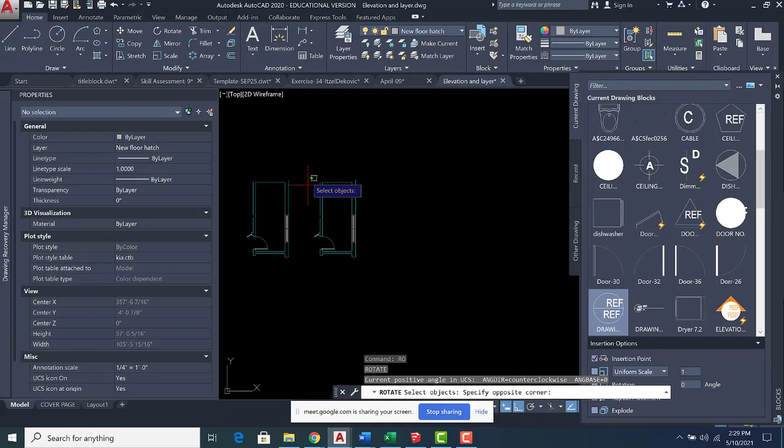So copy it here, rotate it, so you have the next elevation, copy it here, rotate it again 90 to have the next one, copy it, rotate it. So it's much easier, but anyway, you can go back and copy it and bring it here.

Then you add the cutting line, cut them, and do all the elevations. Okay, I don't expect you guys to finish this today, but I just explained it. And tomorrow I would review not the plan. The plan I already did it many times. Tomorrow I would review how you can do the pocket door tomorrow morning, and how we do the elevation, and how we're gonna set it up in our layout.